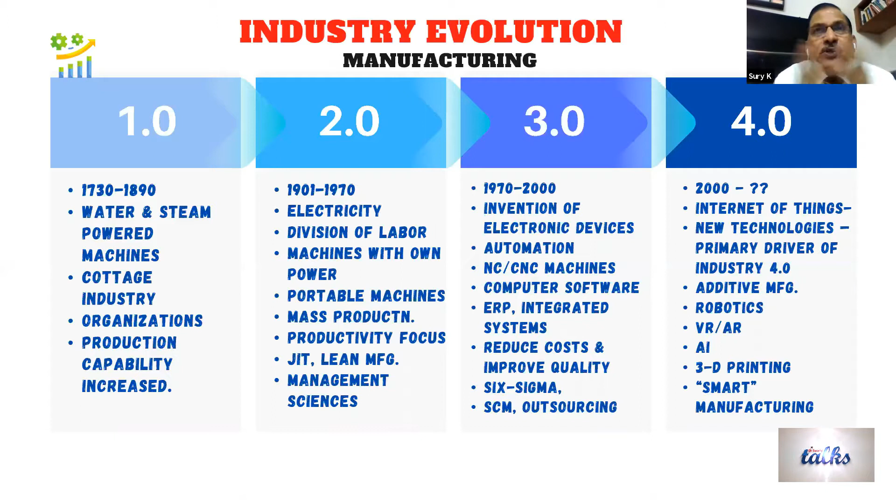Each machining center will have multi-tool capability, 6, 12, 10 turret, tool capacity 16, 20, 30. You can imagine in one machining center how many operations can be done. In 3.0, it was mostly about individual machines with limited capability to carry multiple tools. Whereas in 4.0, when you start using robots even for painting an automobile, everything is controlled through machines, and the machine systems integrate with other machines. That's how the coinage of the term IoT, Internet of Things, came about.

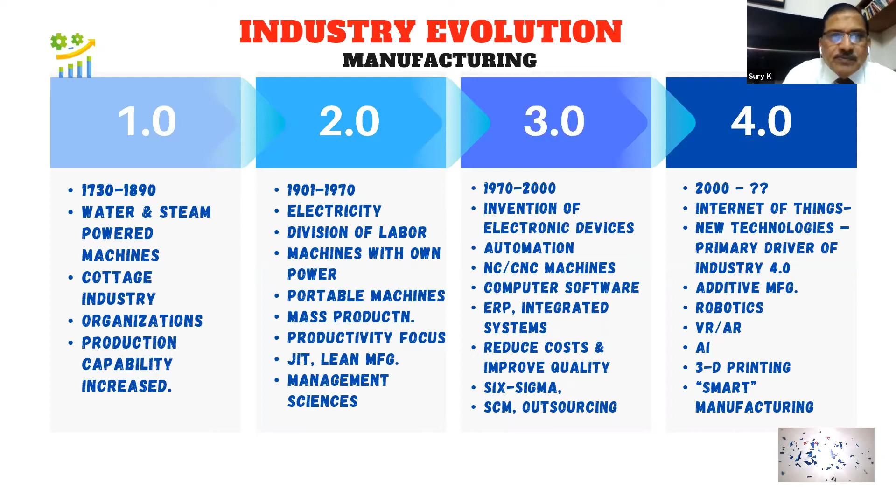So this is the evolution. I am focused on what is about the quality part. In 1.0, it was self-inspection, checks, and a passion for excellence - individuals checking their own work. A sculptor checks his own work. A carpenter checks his own work. A welder checks his own work and they certify.

And 2.0 is more about one department manufactures, another department inspects and tests independently - downstream quality inspection, product testing, statistical quality control, sampling, and metrology tools being used, and statistical process controls being applied, the rule of seven principle being applied for mass manufacture of parts, just to check whether the variation in the dimensions or attributes you want to measure is within limits or beyond limits.

If it is within limits, there will be a limit - a tolerance band for every component dimension to be manufactured. If you are within the tolerance band, it passes. If you are going beyond the tolerance band, the part fails. Then you stop the machine. That's what would have happened.

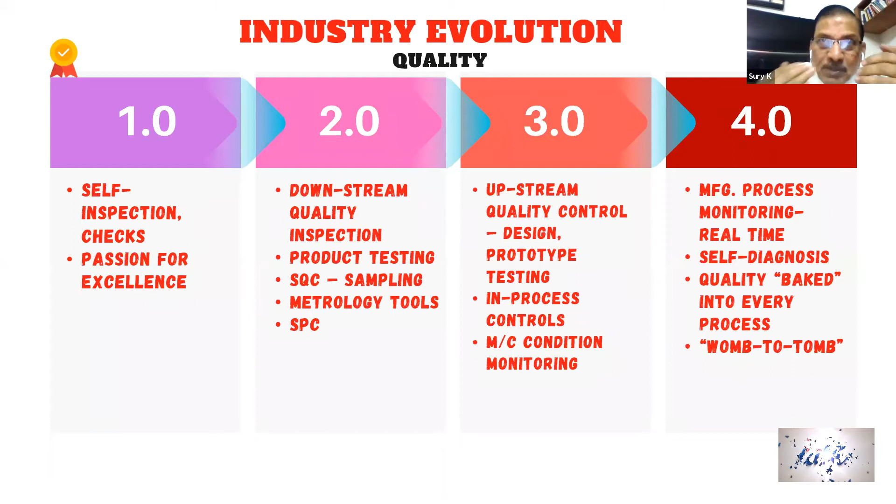That's what was happening in 3.0, where the machines themselves used to check whether they are out of control. Condition monitoring of machines and others used to happen in Industry 3.0, where the checking part, the measurement part, the metrology tool part is embedded within the machine itself. In CNC machines and others, no individual checks - the graph gets displayed of the component under manufacture in real time, and you continuously keep checking whether it's under control or not. If it is beyond control, there will be an alarm given by the machine. The machine itself stops. There will be interlocks built in because you are controlling everything through electronics, through integrated chips. That's what was the revolution in the 1970s that happened.

When it came to Industry 4.0, similarly, the quality part there - now condition monitoring of machines continuously, real-time self-diagnosis of a tool being used, of a raw material being used, of a machine and its process capability. Process capability of a machine deteriorates with time, so you continuously monitor the process capability of the machine.

Process capability, by definition, is the allowed deviation - that is the design deviation allowed - divided by the actual deviation being measured during manufacture. If the ratio of allowed deviation to actual deviation is 2.5 or above, then the process capability is considered to be very high, very good. Most Japanese and German manufacturers aim, through their design, at a process capability of more than 3.5 to 4.

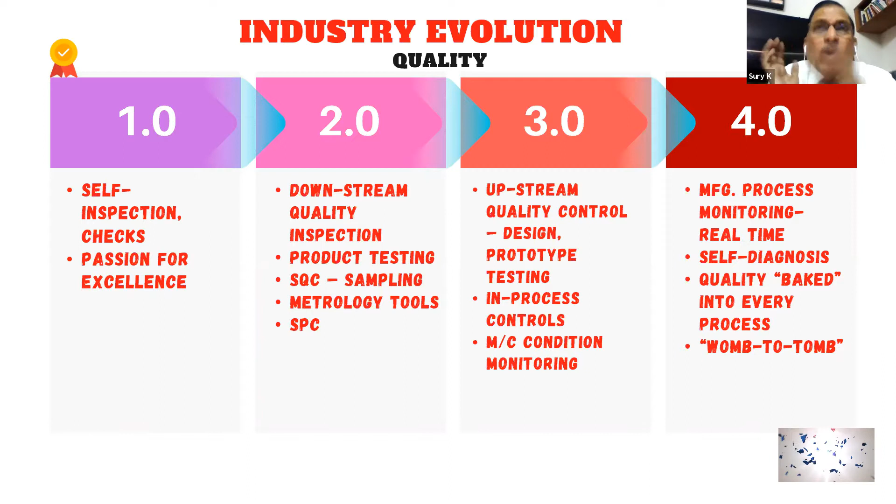Continuously, they keep monitoring the capability of the process. That's what we do in 4.0, because the quality of your product would be as good as the process by which it is manufactured. So totally it is process controls, right from concept to commissioning of any product, throughout the processes the manufacture goes through, all those processes will have built-in quality checks. And that is nowadays called quality baked into every process.

Now we call that quality being baked. Like when you bake biscuits or bread to make bakery products, you need to control the temperature, the time, and the composition of the materials you are using, and the various processes you follow. So you need to control all these parameters, and that's what happens nowadays in quality checks.

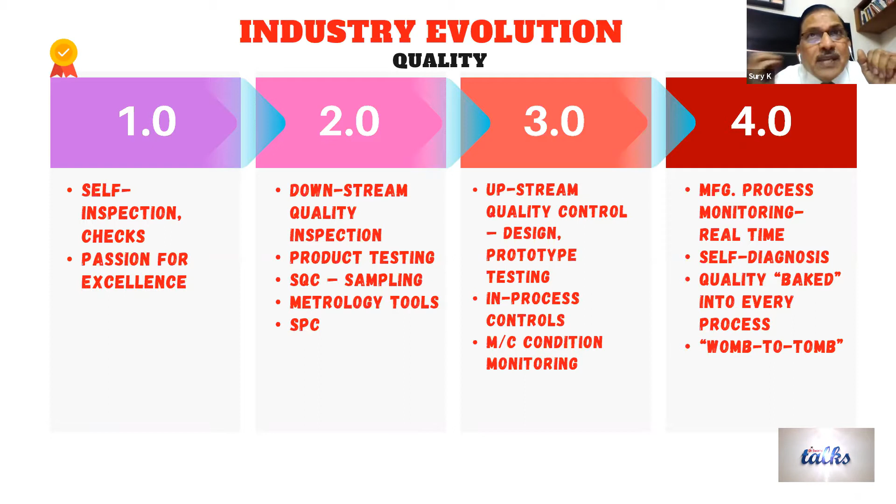That's what happens nowadays in quality checking. There is no individual testing or inspection. Testing will still be there of a product before—it's called acceptance testing, for the purpose of ensuring it meets the customer's requirement, that is still done. But all the in-process checks, inspections, manual inspections and others could be just a visual inspection. The rest of it is done through the process by the machines themselves.

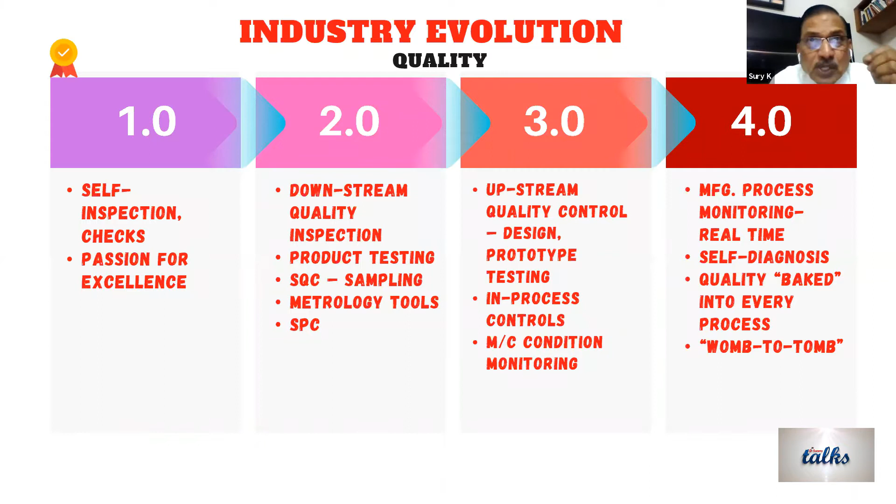If there is a defect, a deviation from the specification beyond the control limits, the machine automatically will self-regulate, self-monitor, and self-control itself. That is how machines get interlocked when they work, so that a small variation at one stage gets corrected at another stage, if possible. If it's not possible, then at the other stage there is an adjustment of the tool to accommodate that variation. So lots of changes have occurred.

Just to give you one example, recently I had been to an Aurangabad-based factory. They manufacture optical fiber cables—it's a Sterlite company manufacturing optical fiber cables, the telecom cables with optical fiber. During the cable manufacture, the machines through which the cables are extruded...

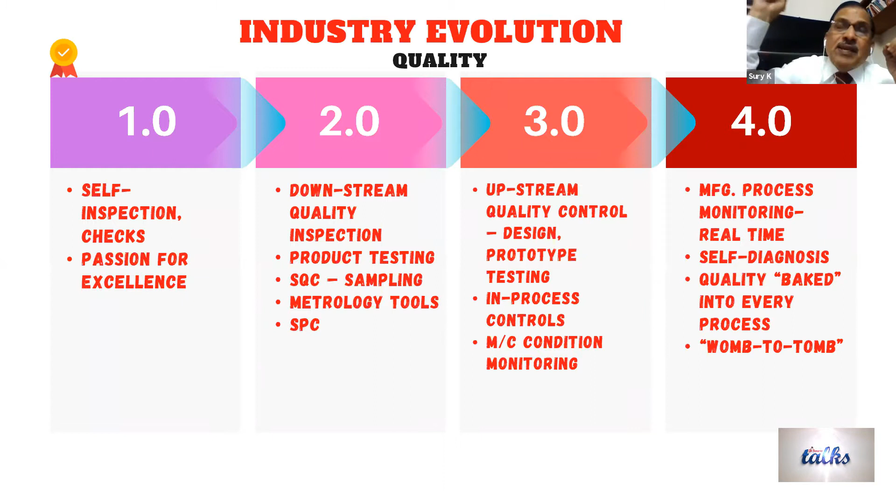Condition monitoring of those machines was happening directly from the supplier based out of the US. If the operator sees an alarm, a display from the machine, which is numerically controlled—if the machine displays that something is wrong, it will give you the error code, what type of error is happening—the operator just stops the machine, informs the supplier, and the supplier from the US, through a video call, will look at the picture, look at the error code, and diagnose from the US, and then it gets rectified.

A lot of self-diagnosis tools are also built into satellite systems nowadays. You are aware that when Chandrayaan-2 failed at the last stage, it failed because there was some defect, because some computational error occurred somewhere. We could not master that, and therefore it failed.

What they do is try to do a proper diagnosis of every element in the entire chain of systems that make up Chandrayaan-2. They go through it minutely, diagnose it, and try to arrive at where something has failed. They will do what is also called FMEA analysis, failure mode effect analysis. Based on the effect, you go back to what could be the failure mode because of which this effect occurred, and what caused that failure. That kind of analysis is also done.

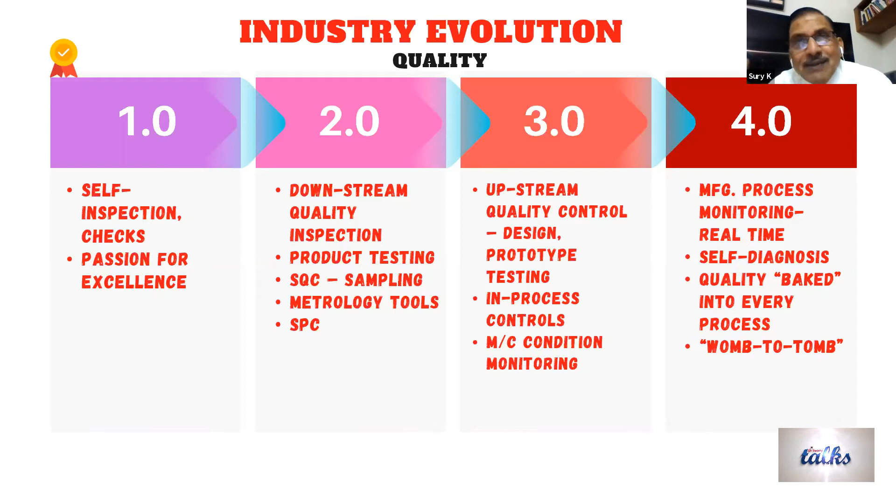Those are done nowadays by the manufacturers themselves, not the customers of machine tools, not by the maintenance group. So maintenance has now become predictive maintenance, preventive maintenance, and condition monitoring of machinery, so that the process capability of the equipment you are using is at a very high level. So nowadays the concept of quality is built into, baked into the process, and therefore also called womb to tomb concept—the total life cycle of the machine or tool used to make components and parts, right from the design of that machine tool till it is retired, scrapped. That's called the womb to tomb concept.

This is the kind of impact nowadays we have, because globally we have become a village. So one area gets impacted, the rest of the world will see the repercussions. So those are the kinds of days where we require high quality infrastructure when you want to become a global manufacturing hub. Roads, ports, goods trains, leveraging cutting edge technologies through skill upgradation and skill development of people.

Just imagine, dear friends, how many of our MSMEs, micro, small, and medium enterprises in our country, what kind of quality control and testing they must be following. And we are planning to leap into Industry 4.0.

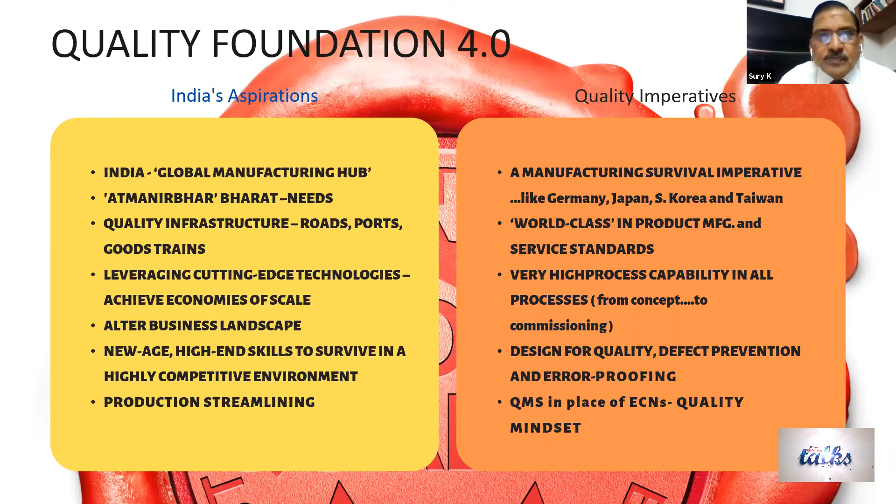So much we are talking about the quality imperative. What does quality mean? Simply, as per ISO 9000 2000 version, it is a degree to which a set of inherent characteristics - the features and characteristics of a product - fulfill the requirements of a customer who placed an order for that product. The customer is paying for it, so the customer expects these features and characteristics. They are also called stated and implied needs of a customer.

Those stated needs, which are called specifications or customer specifications, they have to be met. Also, a customer may not specify certain things, but they will also have to be met. For example, if you are the manufacturer of a microwave oven, the customer will not tell you that you need to provide a handle to open the door, and you need to provide a door handle which is sturdy and cannot easily come off. No - these are necessary.

So those are called implied needs. So stated needs and implied needs being fulfilled, to the degree to which the customer specifies, they have to fulfill. That's it. That is the definition for quality, whether it's a product or whether it's a service.

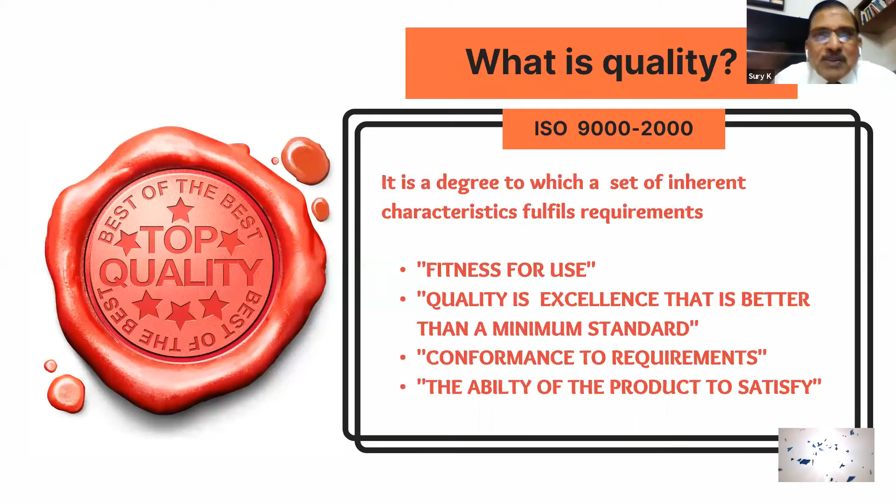So I told you it's about a total quality management system, and quality being baked into every process within a manufacturing organization which manufactures products, or an organization which is rendering services, like say a transport industry, an airline industry - Indigo Airlines and others. They are also rendering services. There also, it's extremely important to ensure that the quality management is built into your service. So I'm not differentiating between products and services.

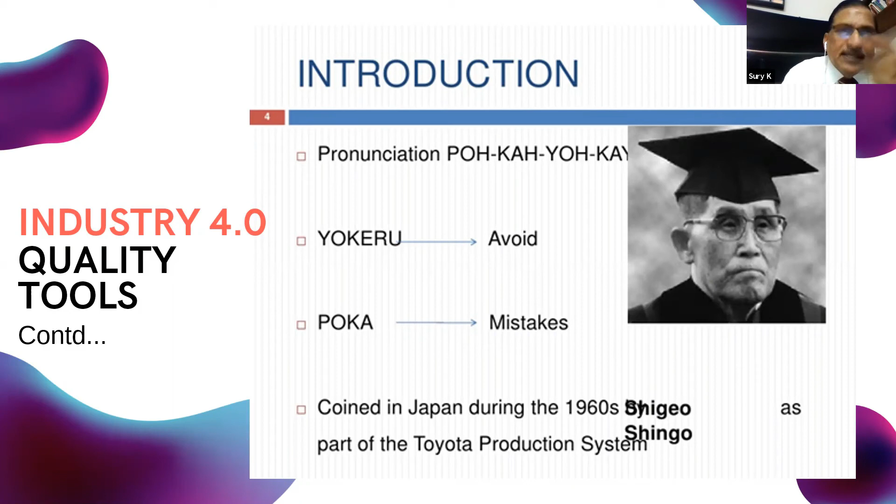I'm just giving a brief about that so you have an idea. A mistake is a deviation from what is correct, right, or true - any deviation from the specification is called a mistake, error, or defect. How do you prevent error? The old way was to scold people, retrain them, tell them to be more careful. The new way is training and motivation, and finding an easy way to do the job. The potential for human error can be dramatically reduced using Pokayoke.

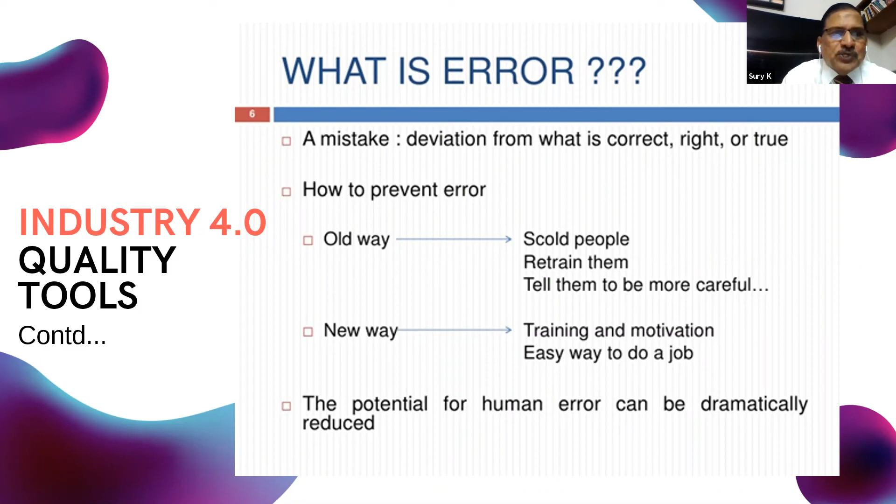How do you do that? You go to the root causes. What causes defects? Errors lead to defects - is it poor procedures or standards? Is it the machine? Is it non-conforming raw material? Is it a worn-out tool? Or is it human error because of lack of sufficient knowledge, skill, or training? All this will have to be probed.

In Pokayoke experiments, they take up a proper case where defects are occurring, check out that defect item, and do a complete reverse engineering of how the defect would have occurred. That is called Pokayoke.

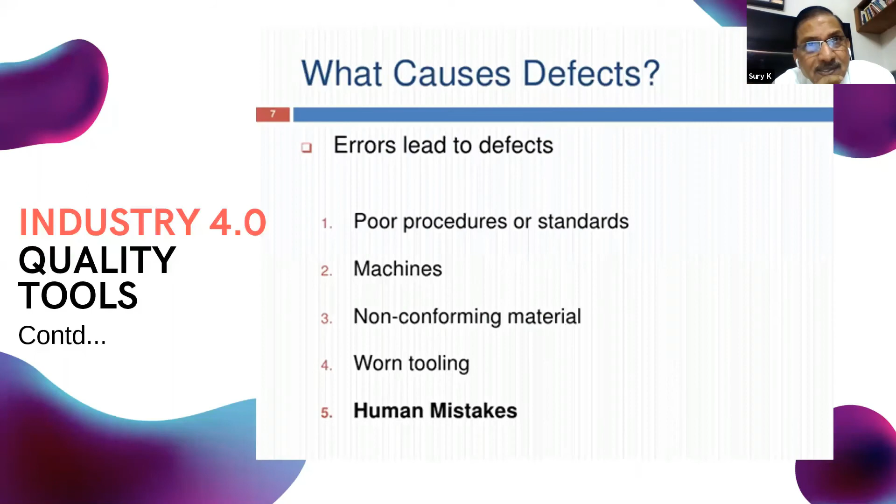So this is the process they go: production, an error is about to occur, control or shut off. This is what is going to happen. This is happening currently across the globe. Machines themselves predict that something is going wrong and they give you an alarm that an error is about to occur.

Control or shut out, type Pokayoke, prevent the error from occurring. The Pokayoke process will immediately kick off. Or you detect, you either predict, prevent it, or you detect an error has occurred, warning or attention, type Pokayoke, and that Pokayoke experimentation software runs through it, does the diagnosis, and comes up with the root cause for the defect that has been detected. All done by machines, no human involvement, and that is the kind of machine intelligence, machine learning that is currently happening using artificial intelligence.

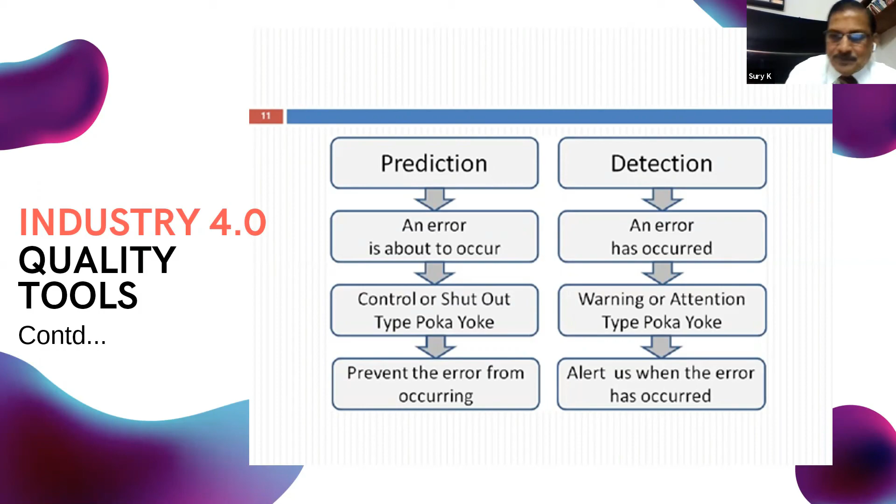What is SMED? I'm just going to take 2 or 3 more minutes. Dr. Swamy, is that okay? Sir, absolutely fine, sir. Thank you.

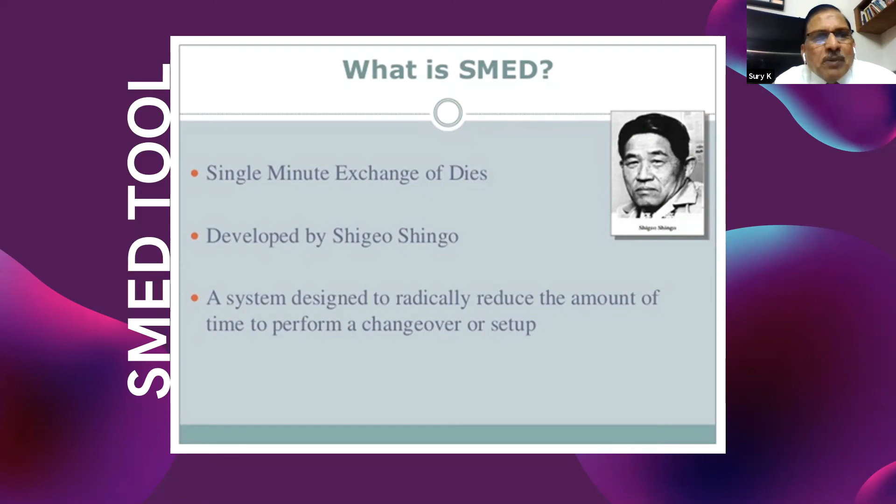What is SMED? I told you earlier, it means single minute exchange of dies. The acronym for that is SMED. Developed by Shigeo Shingo, a Japanese manufacturing designer, it is a system designed to radically reduce the amount of time to perform a changeover or setup.